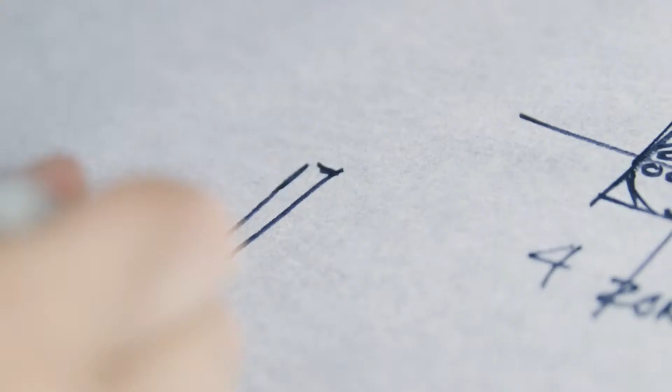Facet aims for changing more than a skyline. Facet is designed as an urban catalyst in which public and private life finds no boundaries. In Facet, the value of free space is equally important as the value of leasable space. It is in the balance of both where one can sustain positive urban life.

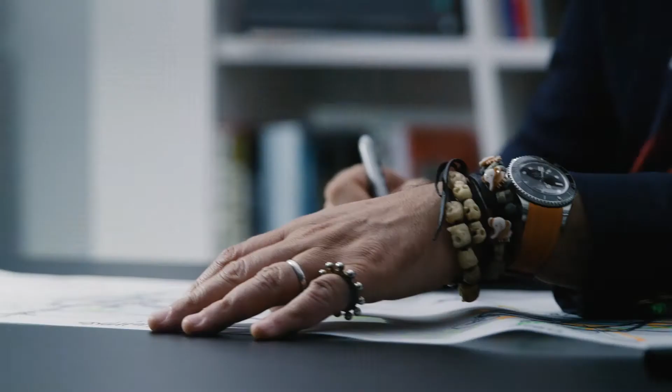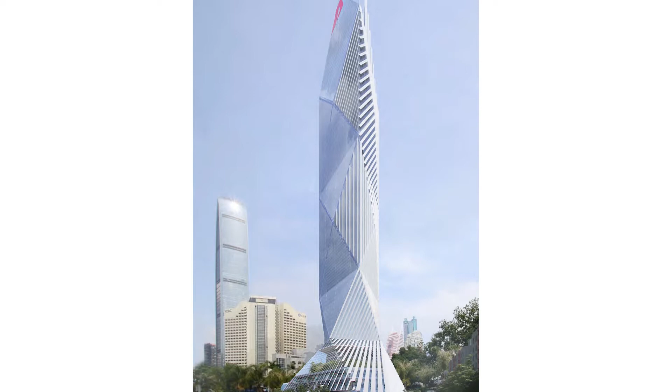I believe that it's through the effective use of free space where we can bring meaningful changes to urban environments. This is our responsibility as architects. The building concept is defined by three principles. I wanted the building to be one form, which really takes off from the ground and then is really sculpted to the top. There's more mass where you need more mass. The building is efficient along the shaft and then it becomes narrower at the top.

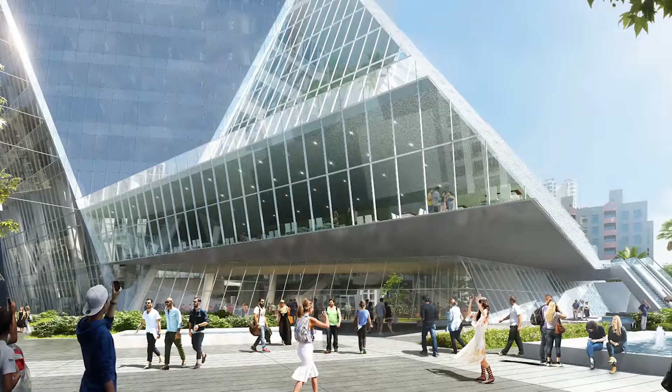The second idea is the creation of a place versus just a space. And I think the program in the podium is giving us tremendous opportunities for that. The diversity of the program is great. The elevated park, the community center, and the bus station combined, I think they're creating a very unique podium.

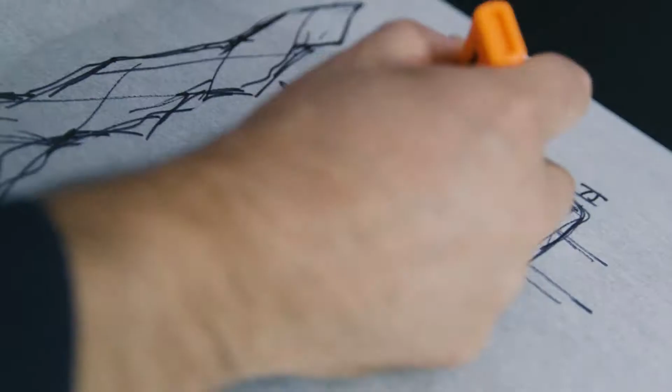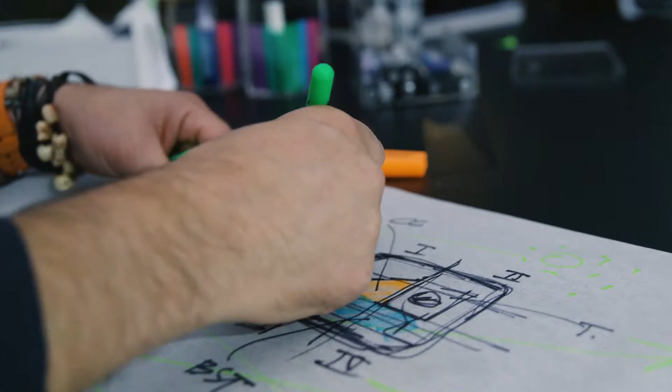And finally, the ability of the building to tell you the story of how it works. I think as we look into the orientation, the positioning of the building, the views, the functions, we wanted a facade that really expresses all these things. You know, a facade that is rich, that is expressive, that is really honest, and that really tells us, here I am not just an office building. You know, I am an experience.

We've done a lot of buildings in China, and context is always very important when we're thinking about this. In this particular case, for us, context was very interesting because there's a lot of significant buildings happening around us. There's very tall buildings, there's buildings already built, there's buildings with boldness, not only scale, but with a certain attitude. And obviously, in our case, it's not about tallness, it's about creating a place. And for us, this was actually more important.

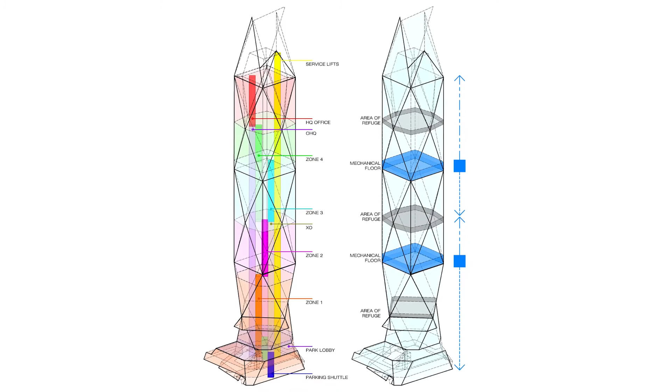Something that is fascinating about this particular problem is that the uses are very diverse. We have a bus station, we have a community center, and in these tall buildings retail is always important, but we have a lot of retail. And obviously, the tower is mostly offices. So I think these podium uses were giving us an opportunity to do something extraordinary.

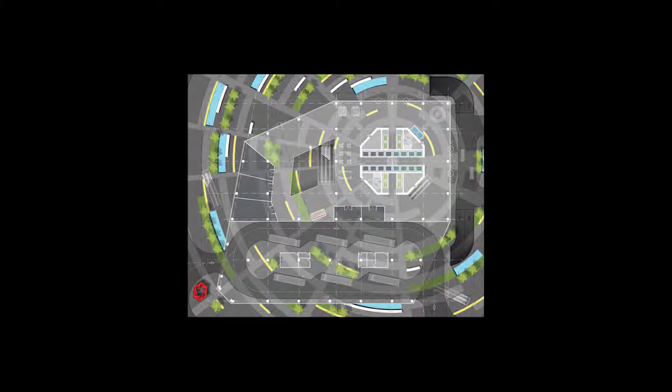And tying it with this idea of creating a place, I think the podium is becoming a very animated place. We think that the podium is going to give us a 24-hour life in this building, is going to blur the boundaries of private and public space, which for us is a very important thing. We want the building to be very open and very democratic.

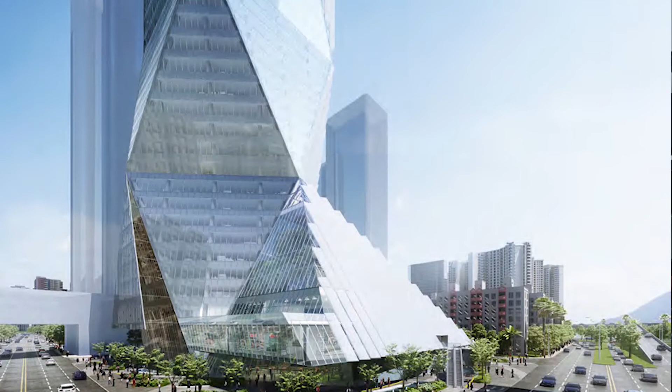Landscape is always a very important element. The sites of tall buildings are very, very tight. In general, there's not enough space to deal with all the traffic, all the drop-off, all the pedestrian flows, and then do a significant landscape concept. But I think in this building, as the podium is raised and we're freeing up area in the ground, there were great opportunities for the landscape.

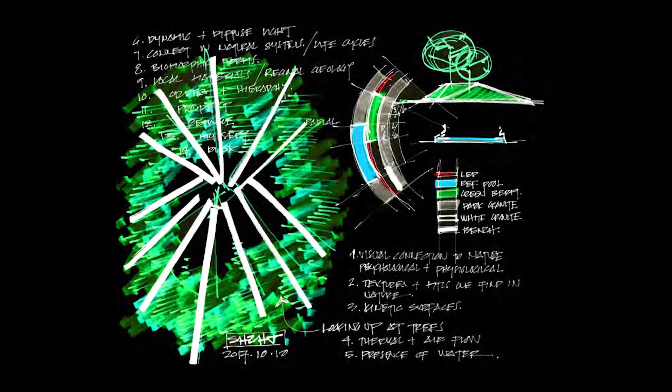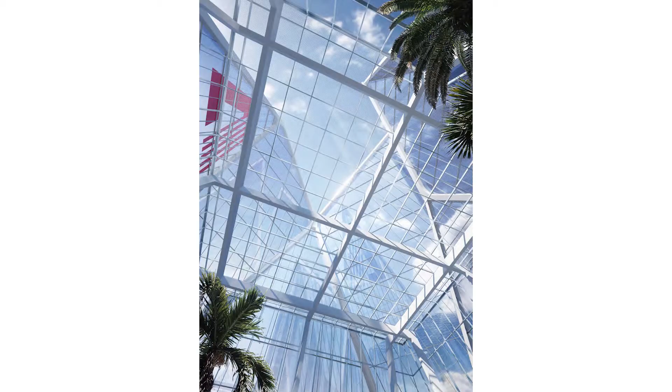So we're creating a concept that was based on the idea of going to the forest and looking up at these trees and seeing this incredible feeling of being surrounded by trunks and leaves very, very high up. And we translated that idea into the plan of the building. So what became remarkable is that all the roads were focusing on the core of the building. So all the roads lead to Rome, all the roads lead to the heart of the tower.

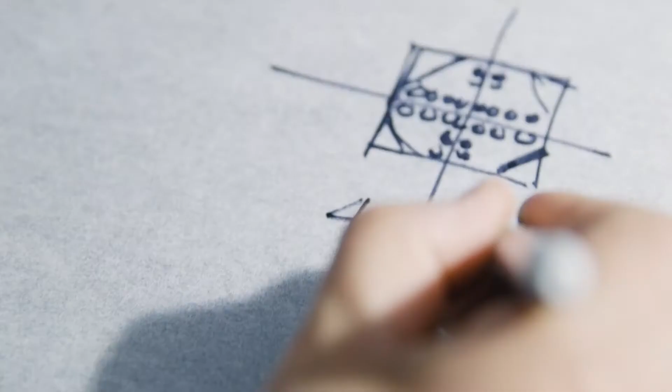When planning a tall building, there's so many parts. There was a very interesting result that we got out of following the guidelines of the program, which had to do with where to put the tower in relationship to everything else. And there were so many natural restrictions. There's the subway line, there's the main avenues, there's obviously orientation. There's this other tall building. So somehow, by default, the tower ended up in the northeast corner.

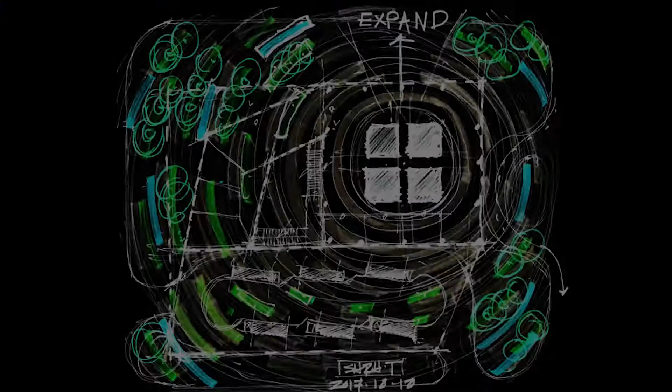That was great because it gave us a point of departure to start organizing the rest of the program. We had the community center in the most public space, which I think was great. And that asymmetry was making the urban relationships very dynamic as we were approaching the building. And of course, the bus station, which is a significant component of the building, had to be somewhere. The natural place was to locate it facing the main avenue because access is easy, and exiting through some of these secondary roads.

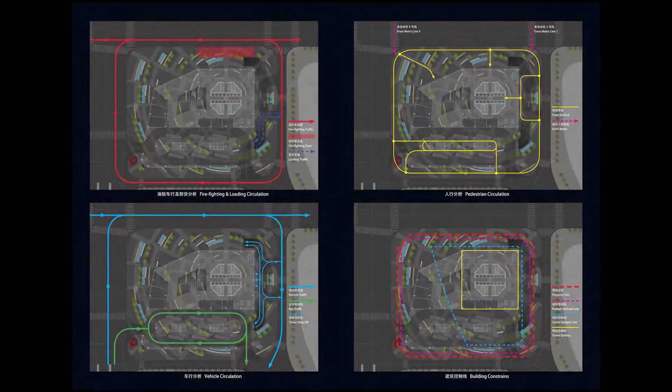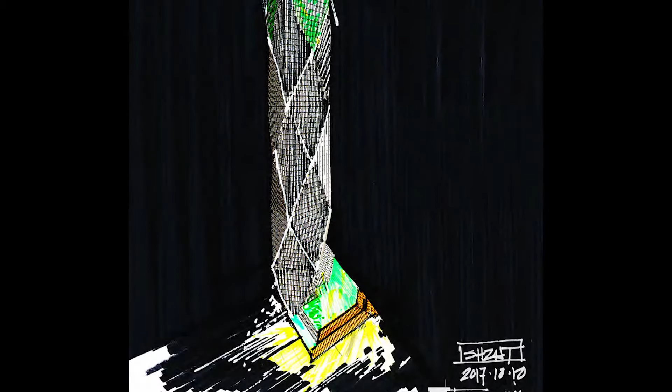Because the bus station is such an important piece of the composition, we felt that it was important to get the attention higher, above the plane of the bus station. So the strategy was to create an elevated park. And we thought that this could be an incredible amenity not only for the building users, but for the public in general. In general, these towers lack this accessibility to public space. They become fortresses, places that are impenetrable.

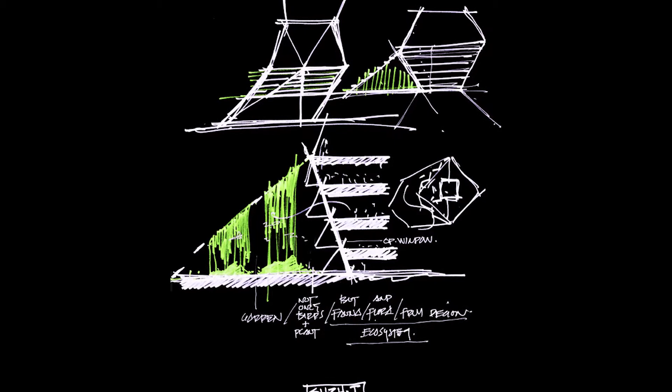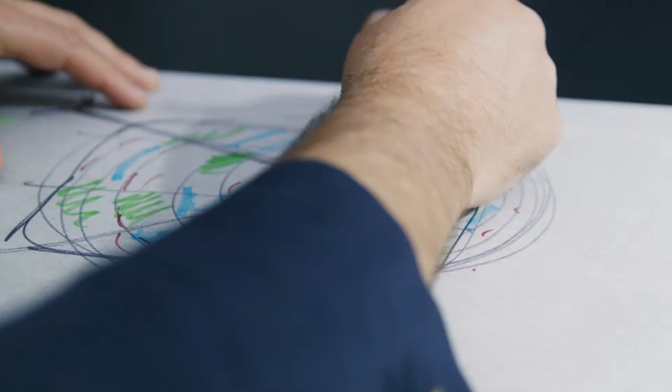And we wanted to create something that is very open and inviting, and that gives us an opportunity to explore this building even when we're not part of the daily life of that building. For a brief moment, we become part of that story. And I think the story of this building at that podium level is an important story, because it's a story about connecting us again with nature, with ourselves, with our context.

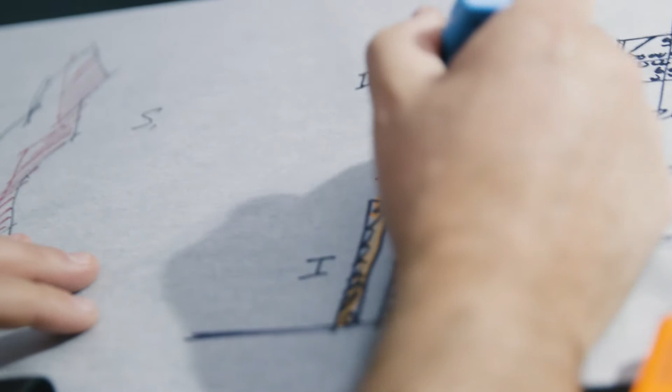It is bringing us back to reflect on what we do. I think we're living life too fast, and as we create spaces like this, I think this is part of the responsibility of the architect, to give the general public places where they can actually reconnect with themselves and then go back and be productive.

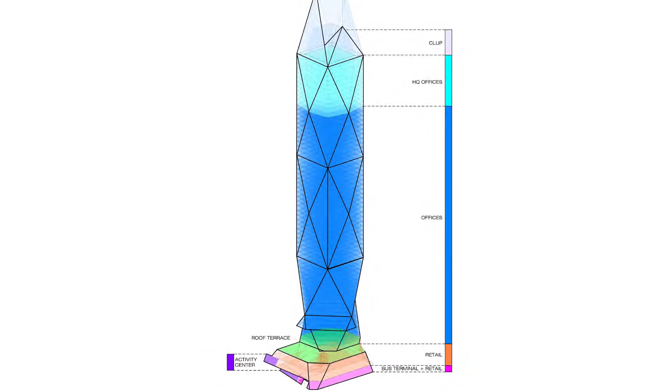Planning in this building is not only about the planning module, which is 1.50 meters, and the column grid, which is 10.50 meters, and the lease span, which is 12 meters. We have a very efficient building. It's a central core. The elevator concept is quite efficient. We have 4 zones, 2 shuttle elevators, and then we have a transfer to the VIPs. It's a very efficient building in that sense, but for us, planning was more about how we can connect the building to the people and to the context.

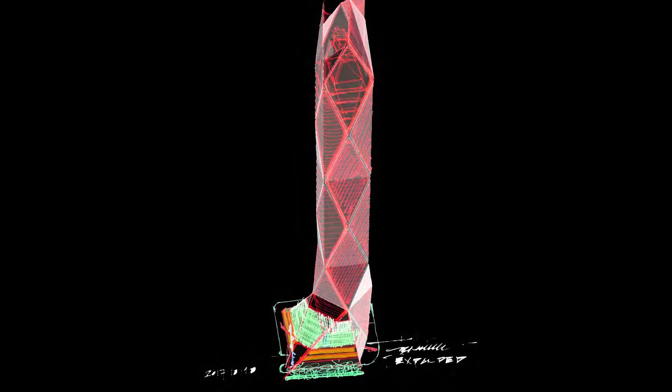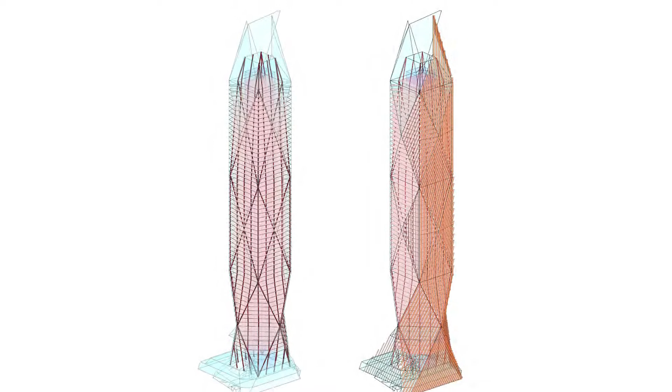When one designs a tall building, there's always this idea of efficiency, at least for me. It's very important. A tall building needs to be efficient in the way that it is planned, in the way that it is positioned, in the way that you access, in the way that you move through it, vertically, horizontally. It has to be efficient in the way it uses resources like water, materials, right? But obviously, with such a critical mass, a building of this scale, the structure of the building is one of the most important components. In the case of this particular building, we decided to go for a diagrid.

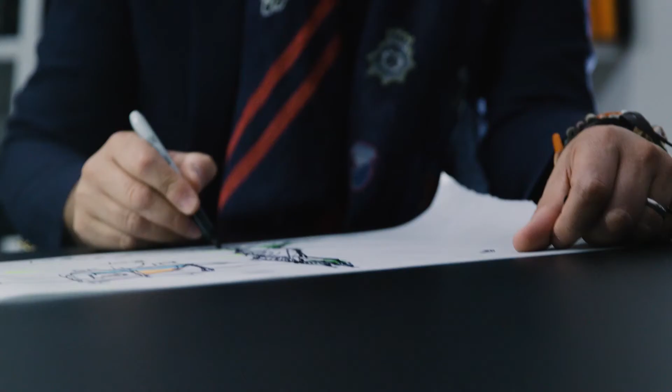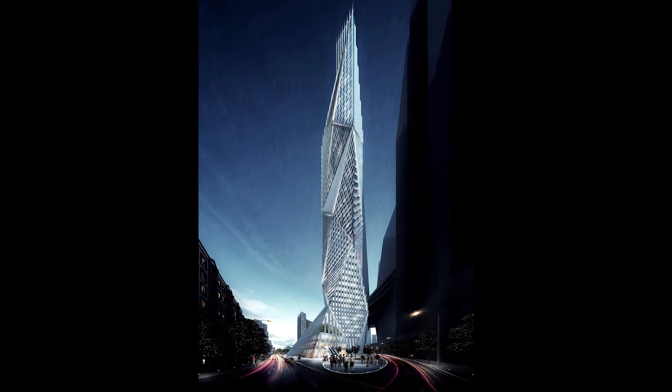A diagrid in a building of this height is probably one of the most efficient structures, because it gives the building a lot of stiffness, increases the lever arm of the building, gives a lot of stiffness in the perimeter. And then in the core, you have a lot more flexibility in the design. In difference to other buildings that use diagrids, we decided not to express the diagrid, not to make it the most important element of the facade, but to express it in a subtle way. We were more interested in the planes of this building taking on a lead role. So each plane, because of the different orientations, starts telling you a story, and in a very subtle way, they reveal what's behind them, which is this incredibly simple diagonal structure.

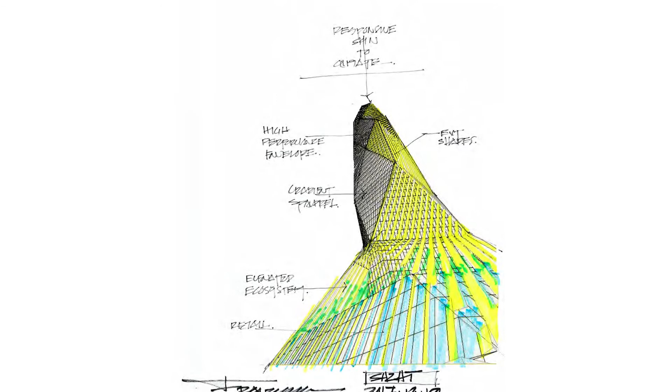The building envelope on a tower is probably one of the most important elements. There's a lot of area, and it does a lot of things. In this particular case, we wanted an envelope that really tells you the story of how the building works. I think the best analogy that I can give is that the envelope really responds to climate and to orientation, almost like the skin of an animal, where when an animal needs more hair, the hair is longer and thicker. When it doesn't, it's actually thinner and shorter. In the north facade, the building is much more transparent, it's very open. As you approach the building from the north, you really read the functions, you see the people working.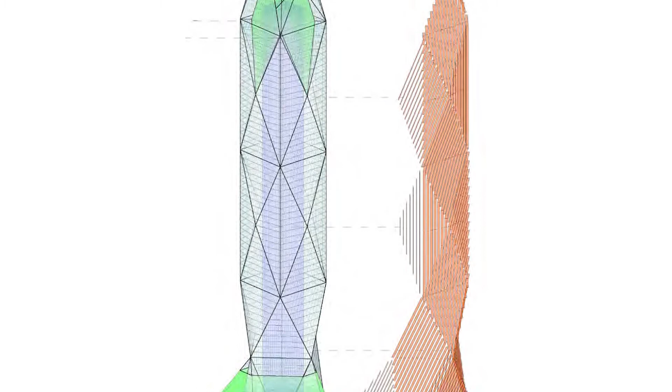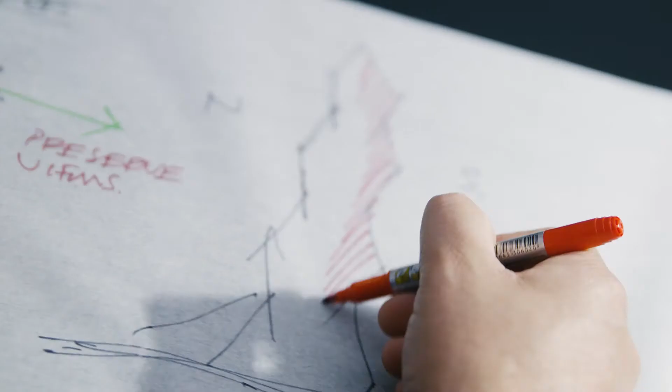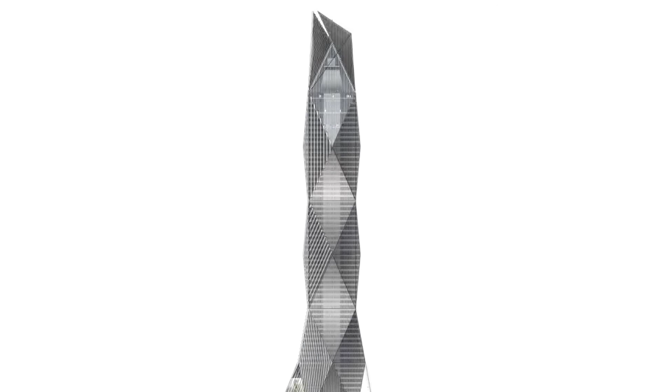If you would approach from the south, the building is much different. The building is clad with a layer of exterior sunshades that go in different directions. Some of them follow the diagonals of the structure. Some of them follow the vertical mullions. And what makes this very dynamic is that all of them follow this faceted facade. That's why we call the building the Facet, because it's really all these planes that are interconnected and facing different angles. And of course, this is going to add tremendous richness to the way the building reads during the day, because of these angles.

They're going to create certain reflections. They're going to reflect the city, the street, the sky. So it's almost like a kaleidoscope in the facade of the building. And at night, it's going to be much more subtle. They're going to disappear, and you're going to start reading more the life of the building inside.

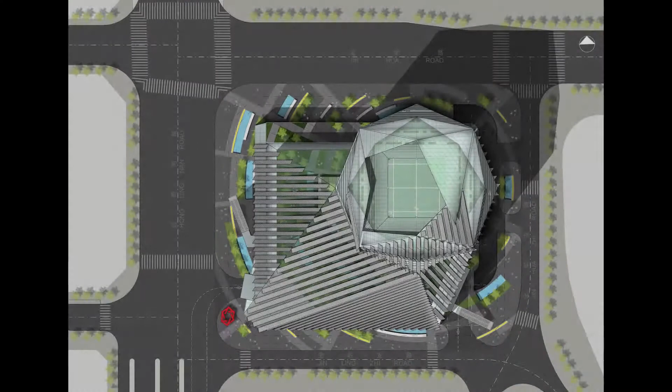In a building like this, energy is a very important aspect of the design. Obviously, there's a lot of discussion about sustainability, and I think it's important when you have such a critical mass and big area and a lot of people in one place. You're conscious about the way you're using water, the way you're introducing daylight into the building, which we're doing here. It's a very important aspect. The way you're reflecting your solar heat gains. In our building, for example, with the use of those exterior sunshades, we're actually reducing the cooling loads by between 20 and 30%, which is a significant parameter.

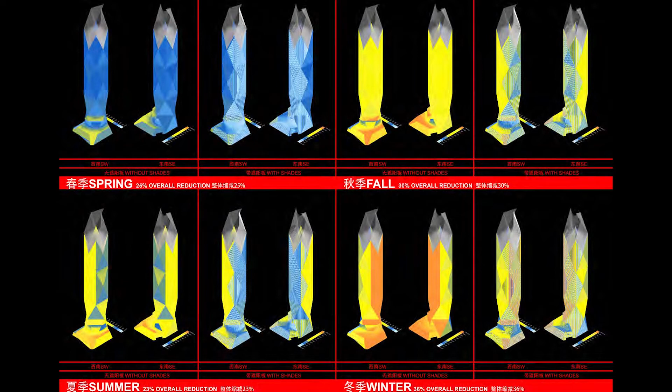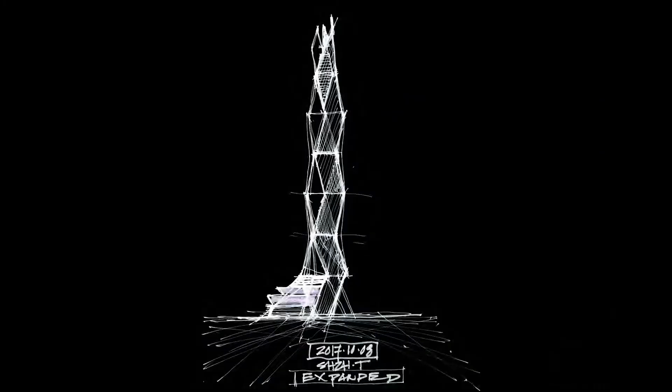But there's another component which is rarely mentioned, but we think is very important, and that is wellness and health. I think biophilic design is something that is rarely applied to buildings of this scale, and that is why the podium in this particular building is essential, because we want to bring a connection to the environment, to nature, and again, as I said in the initial concept of the building, to make this a place and not just a space.

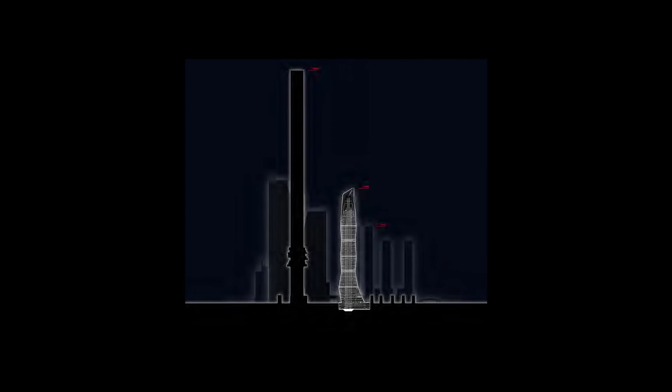In building the city, tallness has become the ultimate choice in developing density. Tallness has become an instrument to advance technological progress and innovation. But in order to really create a sense of place, I think it's really important that tallness must be connected to the dynamics of context and culture. More and more often, skylines are responsible for branding a city, but this really doesn't create a place. Facet is designed with a holistic attitude in mind, in which all the elements of architecture, engineering and environment, functional, technological, are responding to each other, not to create a timeless landmark or a timeless building, but to create a timeless experience.